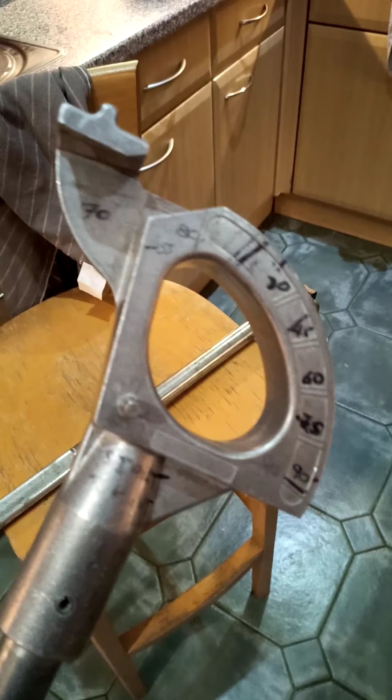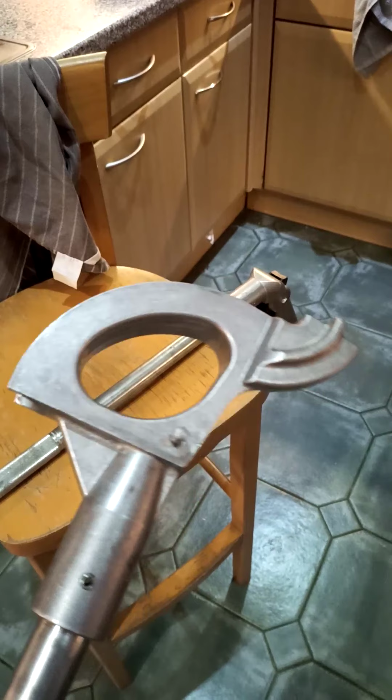So these are quite smart. Rather than fumbling around with 3 components, well, it's not really 3 components, I suppose, on the other ones, but you've got the flappy lever that you can't control, and then you've got the guide to put in, and they're always a bit cumbersome and very heavy as well. So again, when you're getting a bit older or you're a smaller guy, they are quite cumbersome. And also it's easy to line your eye up. There's only one plane, everything is aligned, so it's much easier to judge your bends and get things lined up straight. And this is a 22mm one.

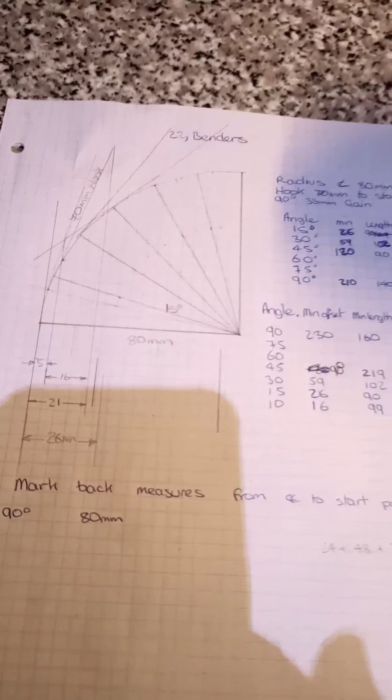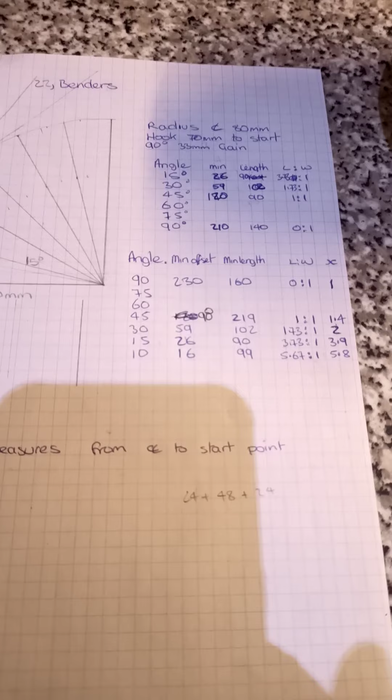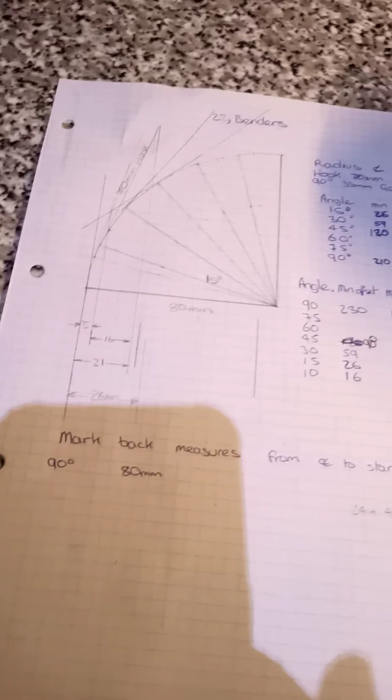I thought I'd go with the 22mm one and work on that one because it's the hardest one. And I've done some videos showing some of the bending I've done, and just thought you might like some of the sort of maths I'm doing. So I drew this chart, and I've basically drawn the tangents to the bending angles for the benders, and then I've worked out the dimensions into a little chart here, which I haven't yet completed. So if I've got any dimension to work to, I can immediately look up the angle that I need for the offset that I need, and just mark that straight on the pipe and pull the pipe pretty much perfectly.

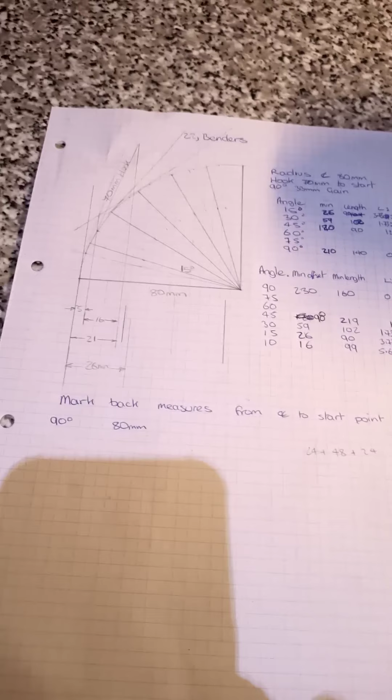I mean, I haven't used it that many times, but literally end to end into position and slot it in, which, yeah, it's not particularly quick, I know, but it's good fun. And I think with a little bit of practice, I could get very quick at it and produce very little scrap. But anyway, the mathematics has been fun.

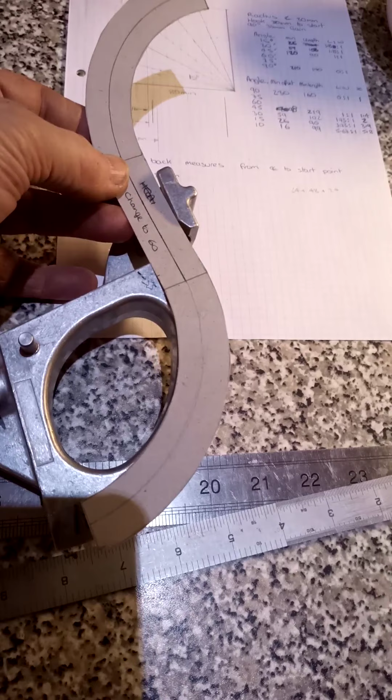So someone said on one of my posts, sorry, I didn't make a note of your name, whoever it was, that they'd struggled to get a full passover. So I thought, well, why? They are a little bit difficult for full passovers, so they don't follow the same rules as the older benders, but I thought, well, I'll just work out what the rules are. So I made up my super tool, which is basically the constraints of the bender. So we've got the section of straight to go in the clasp, in the hook there, and we've got the radius, so the central bending radius and the profile of the pipe.

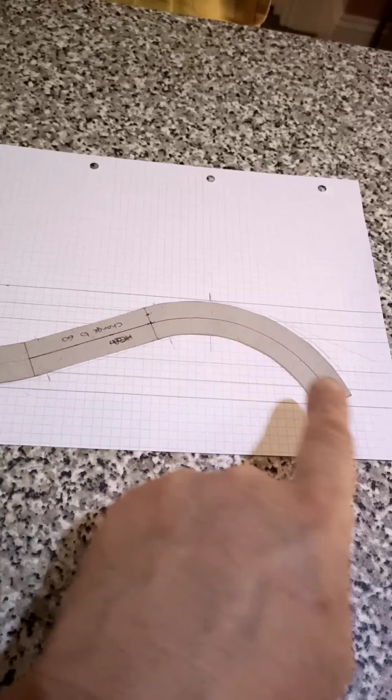So if you want to do any kind of passover, if you just draw the 2 lines for the 2 extremes of your bend, place your template on it, find the 2 points at which you intercept the 2 lines, and that will give you your angle. You can basically intercept the top of that triangle to give you your bending angle. And then actually you can measure off of this drawing all your bending allowances. So we know we've got a minimum of 60 coming in here for my holder.

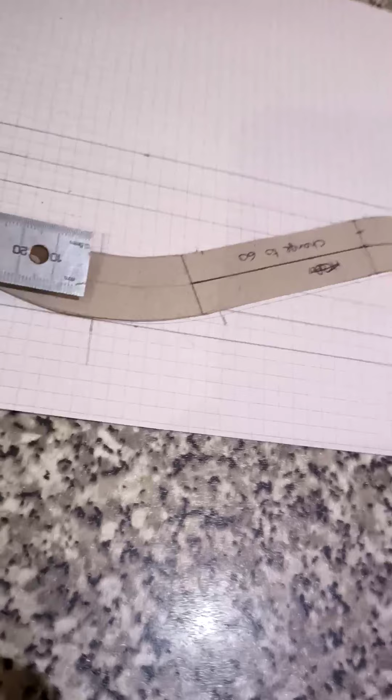So from that point, then I know my mark will be 30 from my 60, so that comes in to start. So first mark at 90 for my benders. Then I'm going to have a second mark for my clearance at 70 plus this. So 70 plus 30 there. Sorry, it's going to be about 100. So go straight to your pipe, mark on your 60, 30 to the centre of your first bend, mark the 100 up to the centre, the 100 back off to the next one.

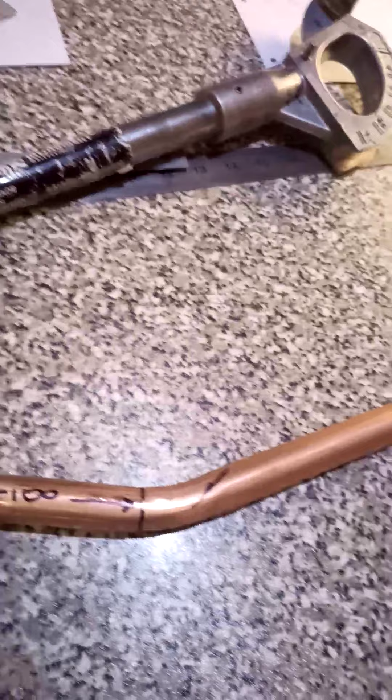So literally you can start where you want to and put the centre of the passover where you want it from the drawing. So no longer do you have to make up a passover and just have to cut the ends or whatever else. You can start at the specific point, and put your bends into the correct place. And you could even go on to here once you've got this reference point, and you could pull a further bend along this pipe and put it all in position. Now this was a passover for a 22mm.

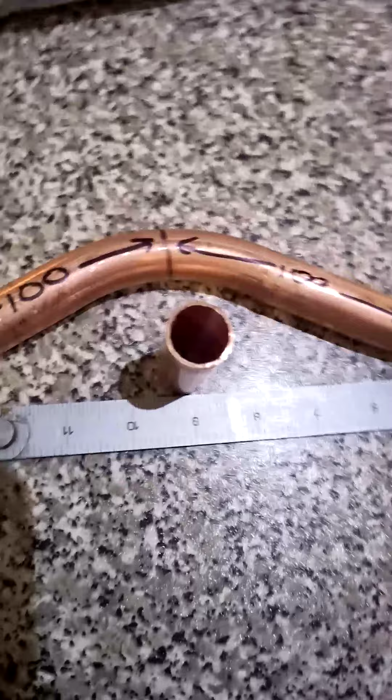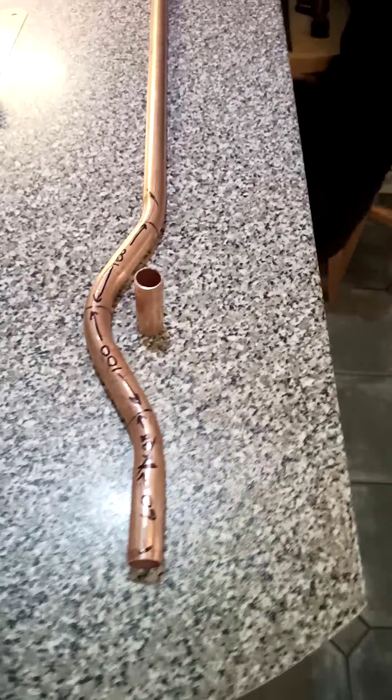So I was watching another tutorial on the internet about pipe bending because it's not really my big thing. But what they said was if you're passing over a 22mm pipe, you should have 22mm clearance. And I can tell you now that is exactly 22mm clearance for my bend over that. So I'm not sure if it's a little bit longer than a bend from the other benders, but there's always a limitation with everything. But perfectly satisfactory full passover, and the angles are pretty good.

So if we go down here, see there, pretty much no gap under, the little tiny bit on the end, just very, very slightly off. But it is the first one I've pulled, so not bad. Anyway, you can definitely pull a full pass. Actually, to be fair, that's better than the full passover I did with my old benders. Just a bit disappointed it's not absolutely perfect, but give it a couple of goes and I'll be getting these perfect.